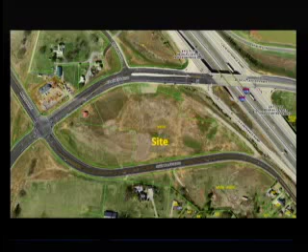There is also an area at the northeast corner of the building which is only about 3.5 feet from the property line. I'll go ahead and pull up the site plan. You'll notice that the areas denoted in the red hatched area are the areas where there is direct access into the building. The area denoted by the blue area, where it says driveway within 10 feet of the building, is the northeast corner of the building, where there's kind of a pinch point at that location. You'll see that the shape of the property with respect to the right-of-way of I-24 at that interchange does a sharp 90-degree turn and creates a bit of a pinch point at that location.

So all of the areas that they are requesting variances for are for areas of direct access into the building, with the exception of that northeast corner of the building.

The applicant has indicated in his letter that the reasons for making application are for the practical reasons of establishing this use on the property, which is a use allowed by right in both the CH and GDO1 zones. These are typical accessory uses, the automotive repair, the car wash, the showroom, to an automotive dealership, and the direct access into the building is necessary for those uses.

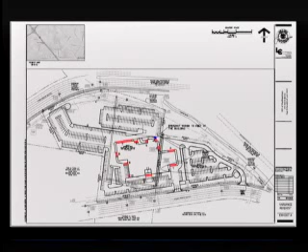Also, with regards to the northeast corner of the building, he mentions that the shape of the property, especially with regards to the right-of-way of I-24, as well as the location of drainage infrastructure on the property, really limits where the building can be placed on the property. So those are the reasons that he has given for his request for this variance.

As I mentioned, the Planning Commission has given this development final design review approval and has indicated that the applicant needed to go to the Board of Zoning Appeals for this variance request. Also included in your agenda materials is a copy of the landscape plan so that you can see the landscape treatment that the applicant is proposing to provide around the building itself.

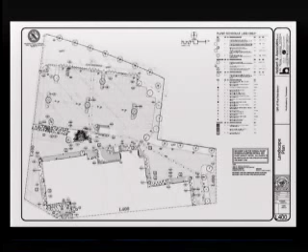With that being said, I'll be happy to answer any questions before or after the public hearing, and Mr. Lukens is present as well if you have any questions for him. All right, thank you, Mr. Blomley. Any questions for Mr. Blomley?

All right, Mr. Lukens, anything you'd like to add to your application, sir?

Okay, then at this time we'll conduct a public hearing. Anyone present wishing to speak for or against the application, please come forward. Seeing none, we'll declare the public hearing closed and open the floor for further discussion or motion.

Chairman Rogers, if there's no discussion, this is very similar to the applicant we had on the opposite side of Veterans Parkway, and I would make a motion that we approve subject to staff comments. I'll second. All right, we have a motion and a second. Is there any further discussion?

Okay, I can't resist making further comment on this. As you know, when the Toyota dealership came to us—not talking to you specifically, Matthew, I'm just looking at you—I was surprised to learn that a car dealership was an allowed use in the Gateway Design Overlay District.

Is that true? That is correct. They can come in as a matter of right into the Gateway Design Overlay District. The only reason they're here today is because of the requirement that there be a landscaping buffer of at least 10 feet between parking and the building itself.

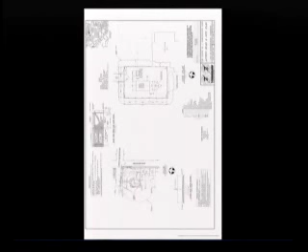Now, it's a little difficult to see on this particular plan, but on the full-size site plans in front of you, you'll see the site plan for the proposed tower location. I'll just go back to the aerial photo. There will be a 75 by 50 fenced-in area to the rear of Fire Station number 4, and the applicant is proposing a 150-foot tall tower to replace that 90-foot tower. The fenced-in area would be an 8-foot tall chain-link fence with 3 strands of barbed wire on top, and there would be an evergreen screen planted around that 75 by 50-foot compound.

The tower itself will not meet the setback requirement for an accessory structure in the RS10 zoning district, and that is the reason for the second variance listed on your agenda. Detached accessory structures, including the tower and the proposed equipment shelter, are required to be at least 10 feet further from the front property line, Clark Boulevard, than the principal structure, which is Fire Station number 4.

The shelter actually is slightly closer to West Clark Boulevard than the fire hall itself. So the police department has requested a variance to the requirement that accessory structures must be at least 10 feet further away from the front property line than the principal structure.

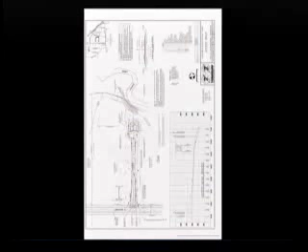And you'll see I have the site plan posted right now on the TV screen. As you can see, it's about 600 feet away from the right-of-way of Blaze Drive and over 300 feet away from the high school property. It is on the north end of the subject property.

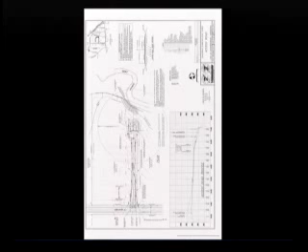The letter from the FAA states that the proposed tower will have no hazard, as well as a letter from Mr. Chad Gerke from the airport stating that it will have no negative impact on the Murfreesboro Municipal Airport. Portions of the proposed fall zone are located on the property to the north, which, as mentioned earlier, is also owned by the city.

However, if the tower is designed to collapse at a smaller fall zone radius, it may indeed end up being contained all within the subject property.

The height variance is due to the fact that in order for this system to work effectively, the tower needs to be of a certain height so that it can exceed the height of foliage and structure, so that it can communicate with the other proposed communications towers.

Both the special use permit and height variance request will require separate motions. If the board approves the special use permit request, staff recommends the following condition: that all other applicable state and federal approvals for the proposed tower must be obtained.

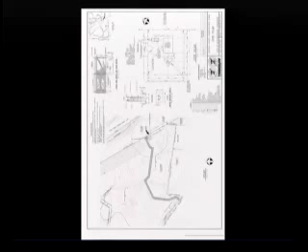Considering that the proposed location is remote from Central Valley Road and from many nearby residences, staff is not of the opinion that landscape screening should be required around this particular site. It should be noted that there are existing mature trees to the northeast on the core property. The applicant has submitted his determination of no hazard from the FAA, as well as the letter from Mr. Gerke from the airport.

One thing I will mention about this particular site is that, first of all, the location of the proposed tower on this site is somewhat indeterminate at this point. As I mentioned, it is shown on the site plan to be 44 feet from the rear property line, hence the request for the rear setback variance that Chairman Rogers went over a moment ago.

But in reviewing the site plan for the proposed tower, staff has looked at the proposed fall zone radius of the tower, which, as of right now, appears to cross the property line onto the core property. So we are looking at the possibility of perhaps moving that tower about 110 feet further in from that rear property line, which would still put it at about 900 feet from Central Valley Road.

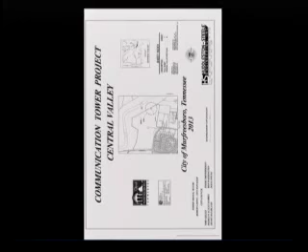Now I'm going to jump back to the aerial photo, which I think after seeing those photos from the ground will help you visualize where the tower will be located. You'll see here where my cursor is located is the silo site, the silo that you saw on the photograph, and the tower would be located back in this area here adjacent to the core property.

With that being said, I'll be happy to answer any questions before or after the public hearing.

All right, thank you, Mr. Blomley. Any questions for Mr. Blomley? All right, Chief Crispin, anything you would like to add to the application? No, sir, not at this time.

Okay, then at this time we'll conduct a public hearing as it pertains to this property located along the north and east sides of Central Valley Road. Anyone present wishing to speak for or against that application?

Good afternoon, Chairman. My name is Andrew Donnelly. I reside at 5256 Reagan Drive in the Liberty Station subdivision. I'm in support of this new system. I do know the infrastructure needs updating, so I understand the need for these towers, but I am opposed to this location.

The first and primary reason is that I don't believe this location requires a hardship to the height restrictions. The city owns many, many acres of land just to the west of this location, which is nowhere near any of these height restrictions. So the city can easily use that land right there that will not be by any of the existing subdivisions to the far west of the city, and to the south, which is the Liberty Station and Liberty Valley subdivisions.

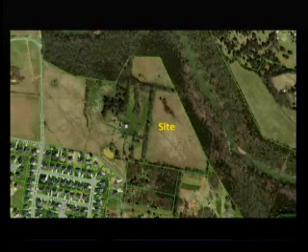I'm very much a layman, but looking at the site plan, it really, if it could be placed near or on where it's labeled potential rifle training, and I'm assuming you're going to have a road that goes back there, that just seems like to me that... but maybe it can't, I don't know.

Mr. Halliburton, I think part of the reason it was located on that site is the centrality of the infrastructure. We know there will be a need for significant electrical power and other utility infrastructure toward the center of that area, adjacent to the tower site, which would help minimize costs, as well as providing access to the tower site for maintenance and security.

Maybe I'm turned around, but if you moved the site to the west, to the middle of the property adjacent to Central Valley Road, would that not be closer to a residential area? If you move it straight west, it would be closer to more residences, yes. Okay.

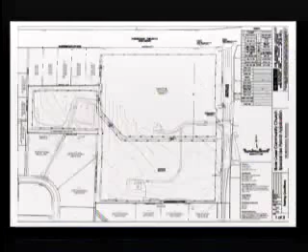As you can see here on this exhibit from Mr. Taylor, you'll see the more detailed view of the boundaries of the proposed site.

The subject property is zoned RS-15, and institutional group assembly uses, churches for example, are required to obtain a special use permit from the Board of Zoning Appeals to be located in an RS-15 zoning district. So the applicant has made a request with the Board of Zoning Appeals for a special use permit for that purpose.

Mr. Taylor is representing River Oaks Community Church, and the church proposes to build out the southern portion of the site, which is adjacent to Birchwood Circle, as well as the residential subdivision to the west of the subject property, in 3 phases. The building would have 3 phases, and the parking lot would have 3 phases as well.

I'll go over the phasing with you. Phase 1 includes a 10,949 square foot building with a 350-seat auditorium and 154 parking spaces.

Phase 2 includes a 10,834 square foot building addition, seating for 350 additional people in the auditorium, and 138 parking spaces. Phase 3 includes a 17,840 square foot building addition, seating for 400 additional people in the auditorium, and 288 additional parking spaces. When all phases are complete, the total building square footage will be...

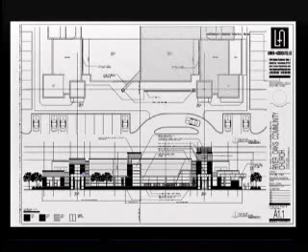And you can see they've denoted Phase 1 and Phase 2. The area on the right side of this line would be the Phase 1 construction, and the area on the left-hand side of that line would be the Phase 2 construction.

This is a view of both the front and the side. The materials proposed are brick, EIFS, and glass. As I mentioned, the building is proposed to be 1 story. The building height for the sanctuary area will be approximately 29 feet in Phase 1.

The proposed building is situated approximately 90 feet from the residential lots to the south and over 300 feet from the residential lots to the west.

Now to go back to the site plan. The site plan shows 2 driveways off of Rucker Lane, and there is a possibility that there may be access to Franklin Road in the future via the remainder of the subject tract. That would require some type of reworking of the proposed property lines or some type of access easement back to Franklin Road.

According to the calculations provided by the applicant, the site far exceeds the minimum parking requirements. The applicant has indicated there will be child care on site one day a week as an accessory use to the church, and there will not be accommodations for RV hookups.

There are proposed speakers at each of the three proposed entrances into the building. The speakers will play music and will not be heard across the parking lot, according to the applicant.

The site plan depicts a dumpster enclosure north of the church building, away from the adjacent residential subdivisions. The applicant purposely designed the site this way so the dumpster enclosure is away from the property lines adjoining adjacent residential properties.

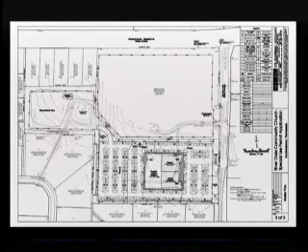The applicant does propose a recreational area in the northwestern appendage of the property, which is the area I pointed to earlier. The only improvement shown for this recreational area is a pavilion. While the church does not yet have building plans for the pavilion, it has submitted a photograph representative of the type of pavilion it wishes to construct, and I'll show that to you now.

With regards to the landscape plan, a Type C buffer is proposed along the south and west property lines adjacent to the developed portion of the site. As we look at the very southern property line, there's a Type C buffer proposed, as you follow my cursor, and then along the west side of the developed portion of the site.

In the recreational area, instead of planting a buffer, the church wishes to preserve the existing vegetation where possible, to create a bit more of a natural feel for that recreational area.

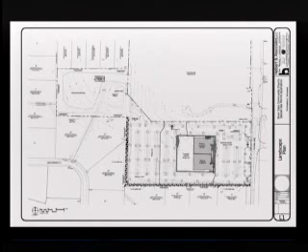If the board approves this application, staff recommends the following condition: a Type C buffer is required along the southern and western property lines, excluding the area denoted as recreation area. Also, the existing tree line and/or vegetation should be preserved along the northern, southern, and western boundaries of the recreation area.

I did want to mention that I received an email from an adjacent neighbor to the south on Birchwood Circle, Mr. Charles Culp. That email has been included for the board's reference. Mr. Culp noted his concerns about existing drainage from the subject site, and was curious as to how the proposed development would be drained to make sure it has no negative impact on his property.

Mr. Matt Taylor, the applicant, who is also the design engineer for the project, provided an explanation of how he intends to drain the property, and his response has also been included in the agenda package.

Staff, in order to address this further, if you have questions for Mr. Taylor, he is here to answer those questions. Staff did provide a copy of Mr. Taylor's response to the city engineer, and Mr. Taylor also spoke with the city engineer, and the engineering department has a comfort level with Mr. Taylor's proposed drainage plan, that it will not have any additional negative impact on the adjacent residential properties.

It appears that the auditorium portion of the building is about 28, 29 feet tall. Is that accurate? Yes.

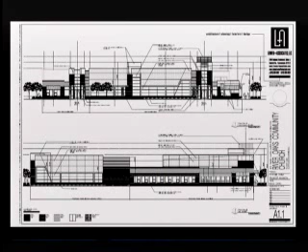Is that phase two? Is that what you mean by the auditorium feature? Each phase has a little bit of auditorium. Phase one has the auditorium around 350 seats. Phase two would add to that same auditorium. And then whenever phase three came online, they would actually move the entire auditorium to the back and repurpose the front, what was phase one and phase two, so that all your seats were in the back, and then repurpose the area that was in phase one and two.

Okay, there's no child care associated with this? Just the Mother's Day Out program once a week. The rest of it is normal business hours, just a couple of office staff on there during the week.

Lighting in the parking lot? It will be lit, but everything's less than 20 feet and not shedding any light across, with the photometric plan.

Could you explain to me about the sound, the speakers? Mr. Blomley stated that there have been assurances that those speakers won't hurt the neighborhood. How do you make those assurances? I think really with the volume of it at the doorway itself, it's really just meant to make it a tranquil entrance. So they want it to be very low key, not out in the parking lot at all. Those entrances are 90 to 100 feet away from the property line itself, plus you've got the vegetation, the buffers, and the cars themselves will help break that up as well.

Are these speakers, you're saying they want it to be a tranquil entrance, is this separate music from what would be inside the auditorium? I think it would probably be a recording of some kind. I don't know exactly what song or anything like that, but it'd be some sort of speaker, probably coming out of the roof structure, would be my guess.

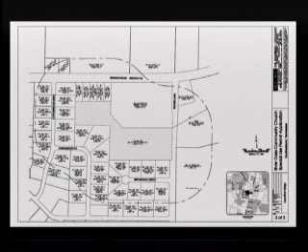First of all, I wished everything could remain as it did 21 years ago when we bought the farm and Mr. Hudson was alive. Mrs. Hudson and I are neighbors. We have a good relationship. I try to watch out for her property, and I completely and totally understand the situation that she is in.

So as far as having change take place, I'm not opposed to a church, by no means. I'm not opposed to the scenario that is coming, but just as Mr. Culp, I am even lower than he is. I am at the lowest point, and for the first 11 years of which we lived at that location, we were flooded every time there was a hard and fast rain. We had up to 14.5 inches of rain up to 3 days in and around our own private moat.

I was in this very place talking to the county about a ditch that was never dug when the subdivision was done, and the county did not follow through. That's done, the ditch was dug, and it does go to that retention pond, which Mr. Hudson at the time used as a cattle pond.

However, as Mr. Culp said, if that pond area, which will become their pavilion and entertainment area, is hard surfaced to where the ground does not soak it up, we will flood along with 8 other people that will back up to it beyond that off of Cottonwood and Meadowwood. And this, if you don't believe me, come on a hard, fast rain scenario and you're going to see, because the ditch now drinks it as fast as it possibly can.